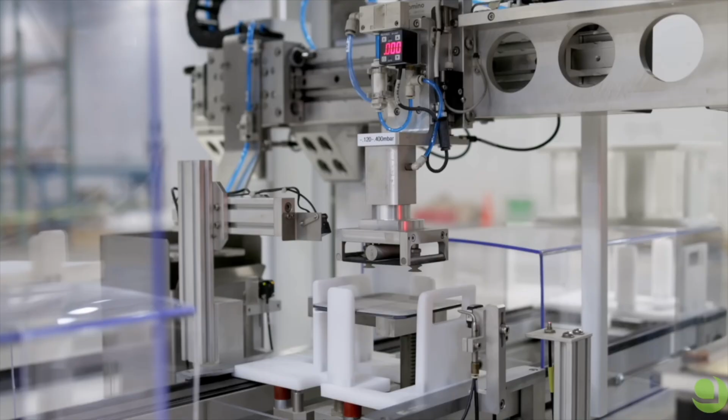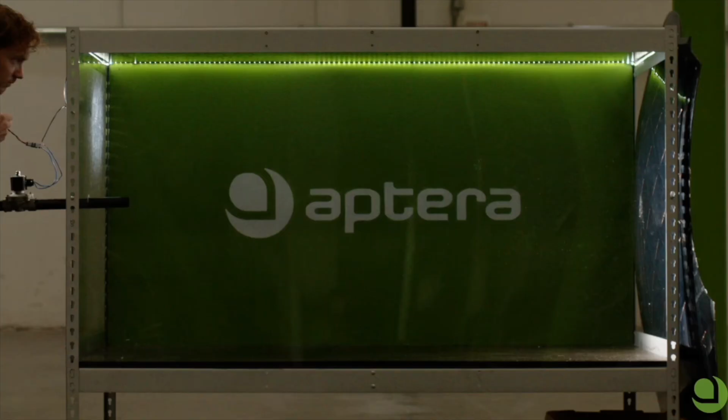Got another part for the podcast, and this is actually part four. This is the final part, and he's actually talking about his manufacturing process, what problems they may run into, and getting these Apteras into the hands of the people. And actually, he also talks about how they're going to set everything up manufacturing wise.

So yeah, let's go ahead and talk about that. We'll listen to it and then we'll talk about it at the end.

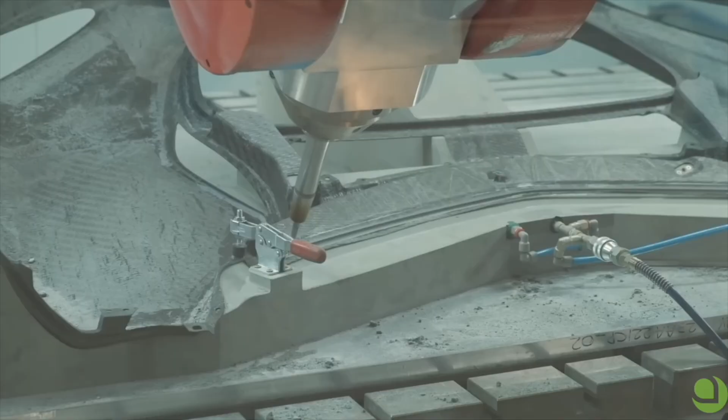You're listening to A Climate Change, and I've got Steve Fambro, CEO of Aptera. Steve, exciting times for you and the company. How many people are currently working for the company, and how many people are you going to need as the company goes into production of the vehicles?

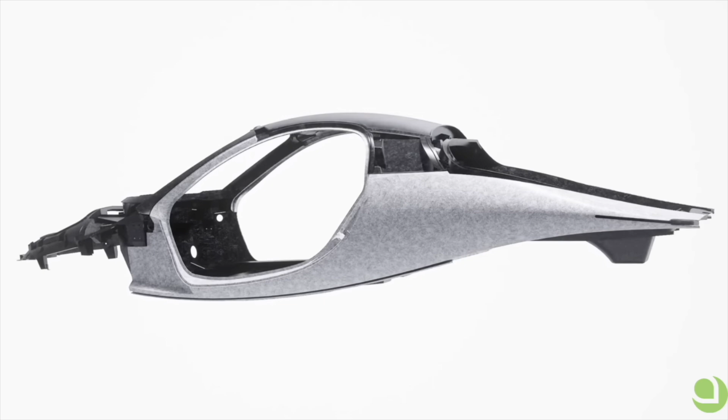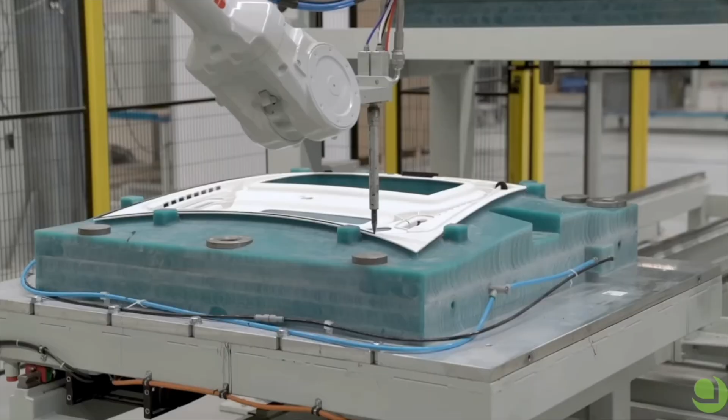Here in the U.S., we have about 100 folks under our roof between our solar facility just a couple miles down the road and here at the headquarters. Overseas, mostly in Italy, we have probably another 20 to 30 people, maybe 50 or so through various vendors that we're working with. So suspension, lighting, aluminum castings, that kind of thing.

To get the vehicle in production, the team in Italy will grow by about 30 folks. And our team here will grow a little bit less than that for the final assembly, because we're going to be doing the body assembly in Italy first, shipping the bodies over here, probably with the suspension and wheels on it, where we'll put on the glass, we'll put on the solar panels and that kind of thing.

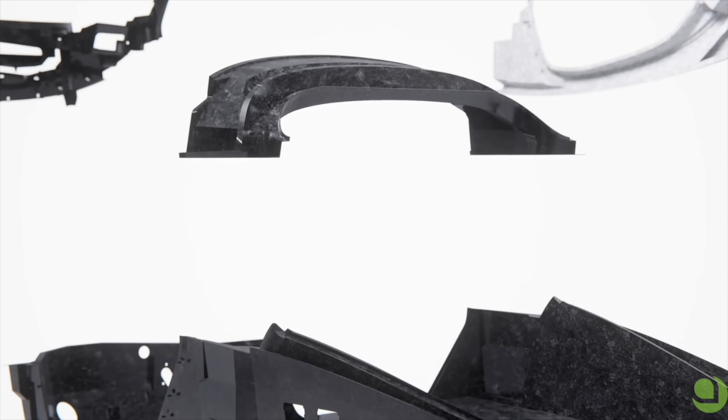That final balance of what we're going to do in Italy versus what we're doing in California hasn't been decided yet. But our original plan had us only hiring about 40 people for the factory here. It's going to be a little bit less than that. At a 12-minute takt time and 40 vehicles a day, there's not a lot of people that are needed.

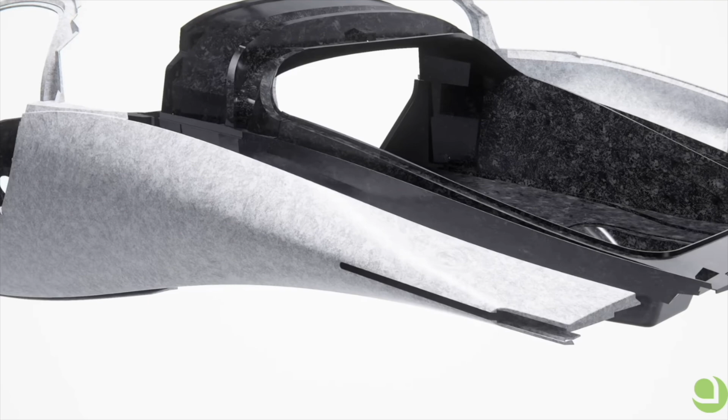Most of the engineering will increase for validation, testing, et cetera. Some of that will be outsourced through our partners that do that kind of work, Roush, et cetera. But some of those engineers will be full-time in-house. So you're probably going to see that climb up to about 300.

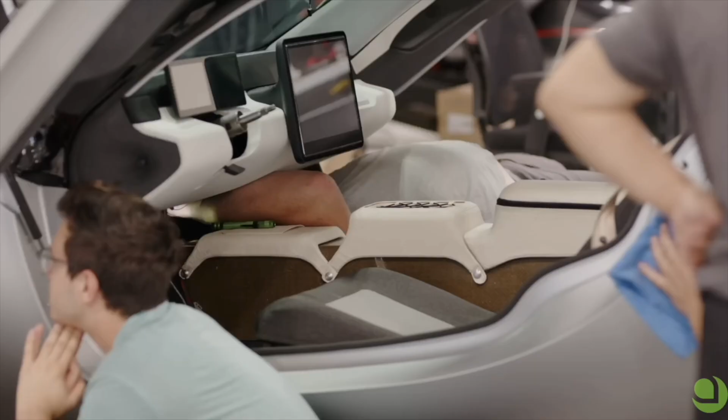And if you tell that to anyone in the automotive or startup electric vehicle industry, they'll laugh. They'll say, "There's no way you can do it with that. It's so small." But again, we're not building a traditional car. We're building a much simpler vehicle. It has fewer parts. A lot of our partners are validating these various systems for us.

So there's much less work that we have to do than a typical company. There's other EV companies who maybe have hired thousands, tens of thousands of people to do all of these tasks in-house. We just don't have to do that. We have competent partners that can do some of that stuff better than we can, and we leverage that.

So in terms of vehicle production, you had said 40 vehicles per day. I was just doing the math. That's about 1,200 vehicles a month, 14,000 vehicles a year. Is that your target? Where do you see this going in the future?

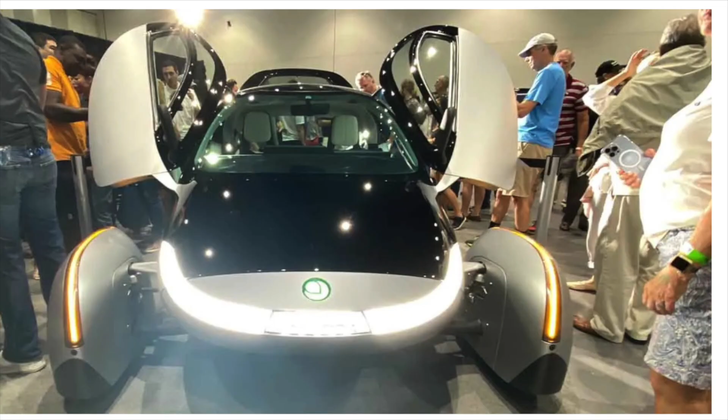It's 40 vehicles a day per shift for this building. What that gives us is a starting framework that we can demonstrate here and then either copy or scale. It remains to be seen based on all the different economic variables of energy, labor, everything else.

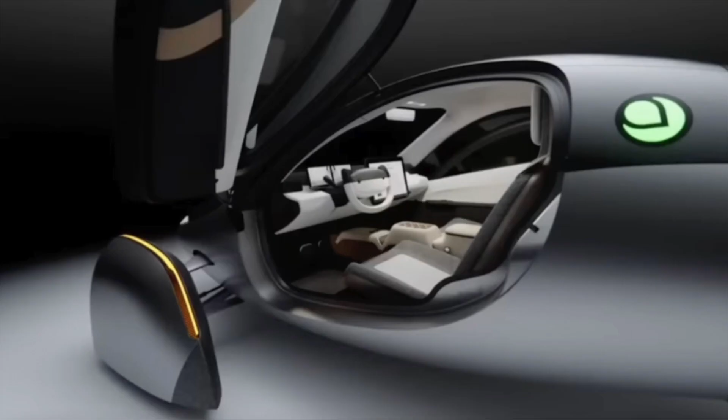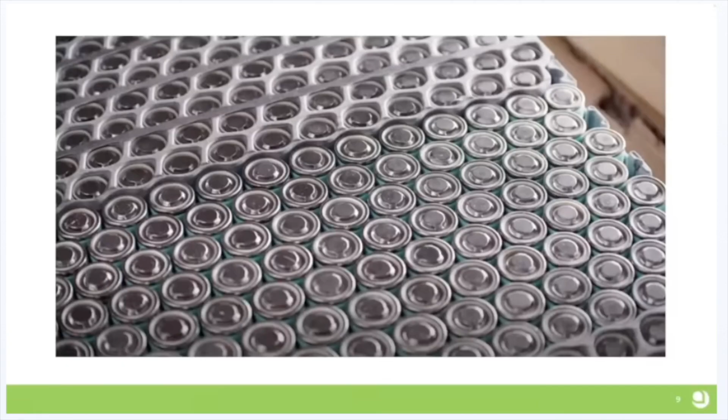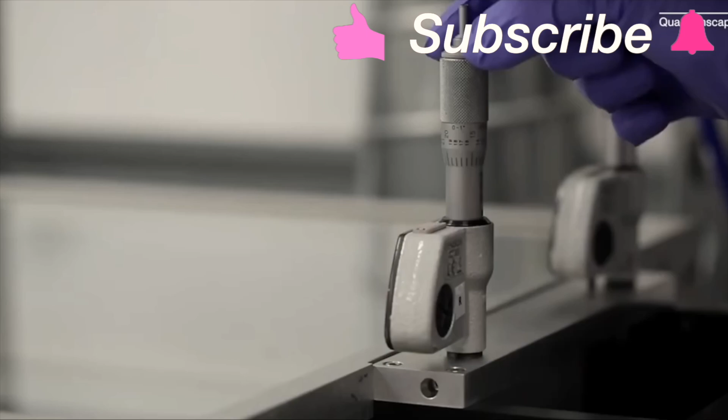If the optimum assembly for this vehicle is 2 or 3 facilities around the United States or one big facility somewhere, central or on the East Coast. That calculus isn't clear to me yet, which one of those are better. I know the way the industry goes. The industry goes for a single facility, and they do that because it's highly capitalized, and they can't afford to copy that capitalization everywhere.

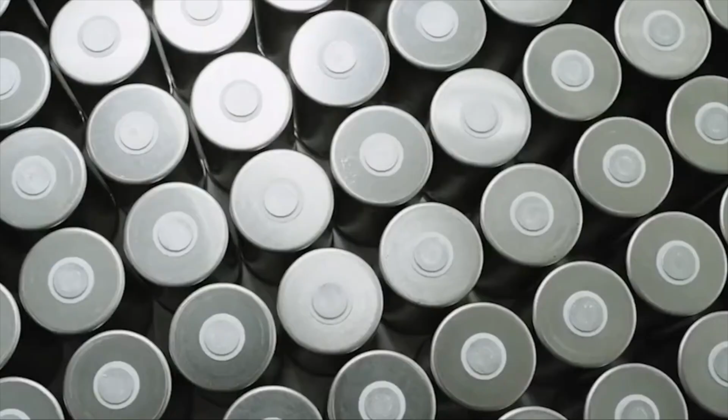But our vehicle doesn't have that. It's assembled very differently. When the parts come in from the suppliers, it's almost like taking flat packs of IKEA furniture and just deciding where you're going to put it together. You probably want to put it together really close to where you're going to use it, like in your living room or in your kitchen or wherever.

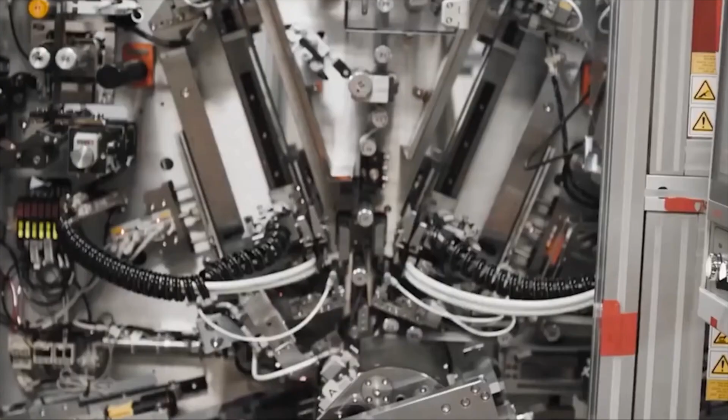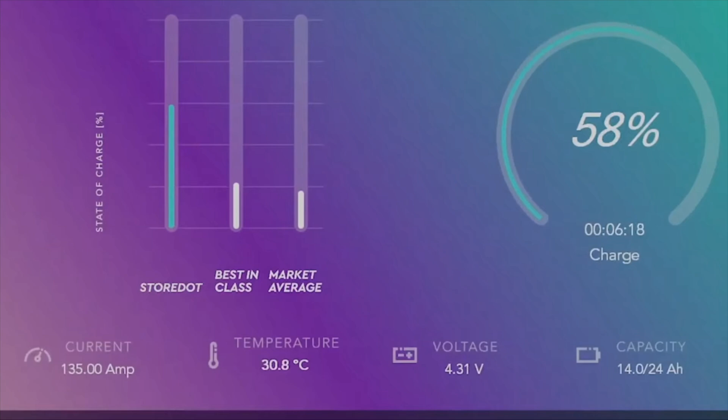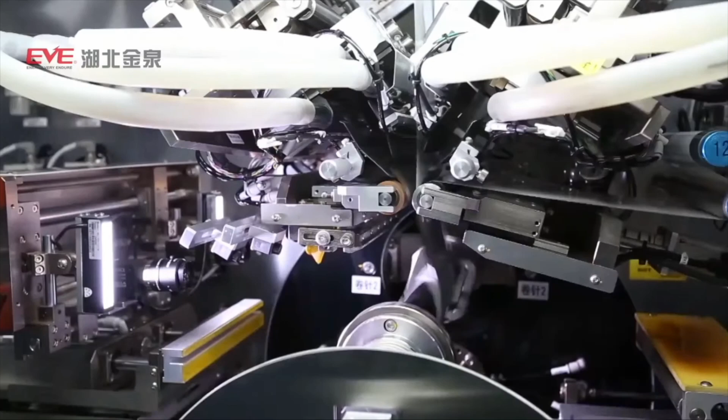You don't want to put it together some distance away and ship that product to there. So that is our strategy, is to have the subassemblies kitted and packaged from the vendors so that we can literally bolt this thing together anywhere in the world. And there's all kinds of advantages and reasons why you'd want to do that, not the least of which are tax advantages, depending upon the country that you're either building in or importing into, et cetera.

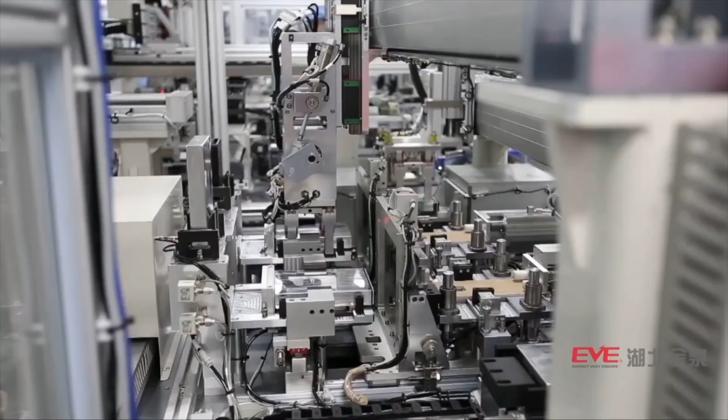That is fascinating, because that is truly revolutionary to put together kind of a car like a piece of IKEA furniture. I realize you're simplifying it quite a bit, but still, to stand up a manufacturing facility of a vehicle is usually a multi-billion-dollar equation, and to do it for far, far less than that is revolutionary.

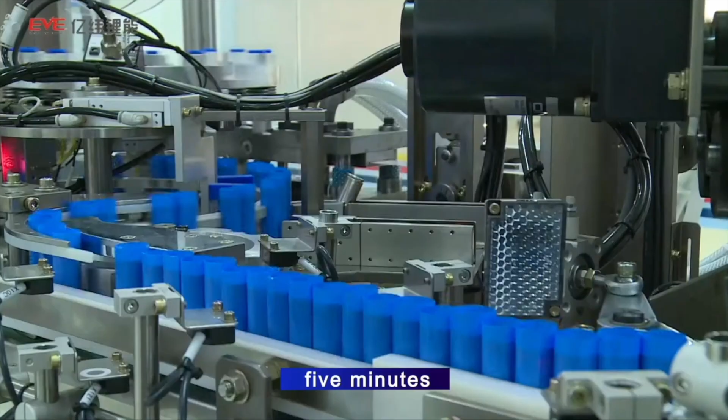It's expending a hell of a lot less in resources, and if we're talking about sustainability, that goes a long way. As we were discussing off air, one of the things was using less of this carbon fiber than you would of steel, because it is stronger, at a magnitude of 2, 3, 4 times stronger. So you're using less material as well in making the vehicle.

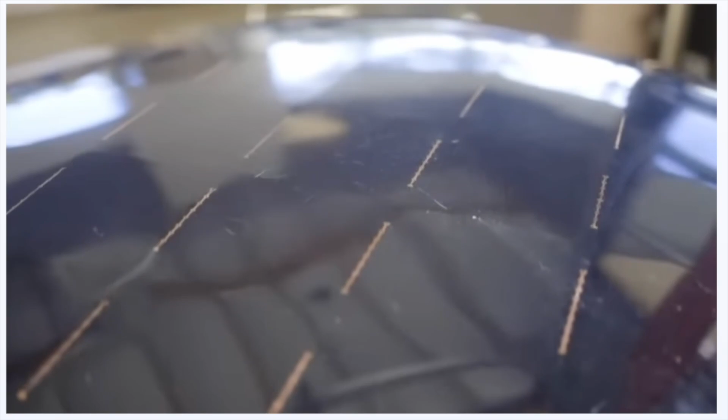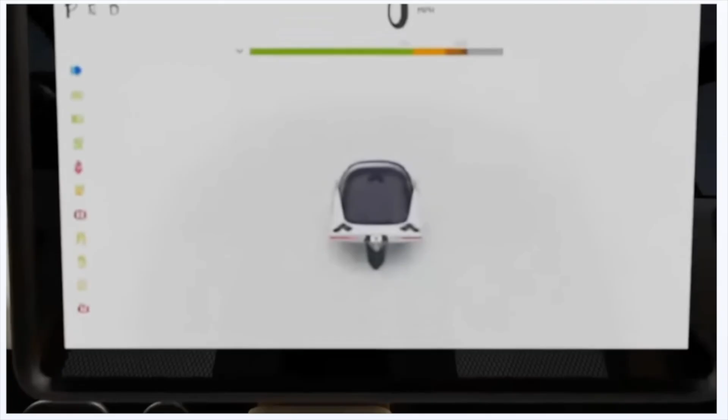That's right, and I think that's most engineers, most companies that engineer a product. They really only want to use the amount of material that's necessary. They don't want to overdo it. Nobody does. But in our case, we could have made our original Alpha vehicles that you've seen driving around. Those are 100% structural composites. So there's no steel or metal coming from front to back in the vehicle. The entire composite structure carries loads.

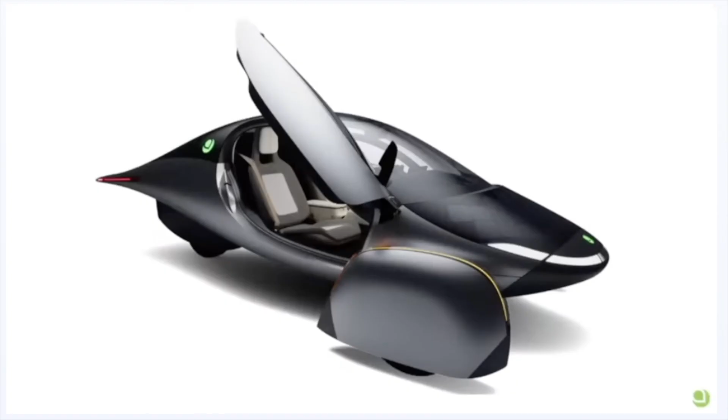And there's pluses and minuses of that. There's reasons why you'd want to do that or you wouldn't. In our case, what we found is, although we could make a technically lighter part with our sandwich core process I mentioned to you earlier, it wouldn't scale. That's a big reason. The second thing is that you can't accurately model it in a finite element analysis. You can kind of model it, but

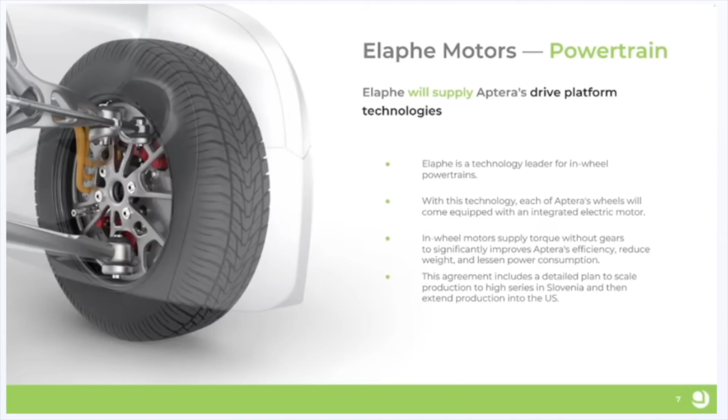because the material is discontinuous, to use an engineering term, you've got these hard interfaces of fiber and resin, and then a core, and those are all discontinuous. Those are what they call edge effects in finite element analysis, and it's very difficult to model that. So it means you have to do a lot of destructive testing to characterize a part, and companies do that all the time.

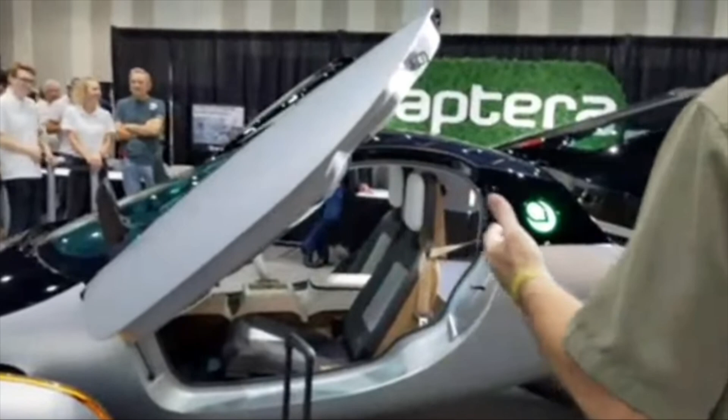But the advantage of going with CPC is that their material is homogeneous, and so it's well characterized. It's isotropic. It has the same reactive nature with force in any direction, as opposed to a composite panel, which is stronger in one direction versus the other. So we give up some of that weight benefit to have something that can be modeled easily. And that lets us really fine tune and reduce the amount of material that's needed.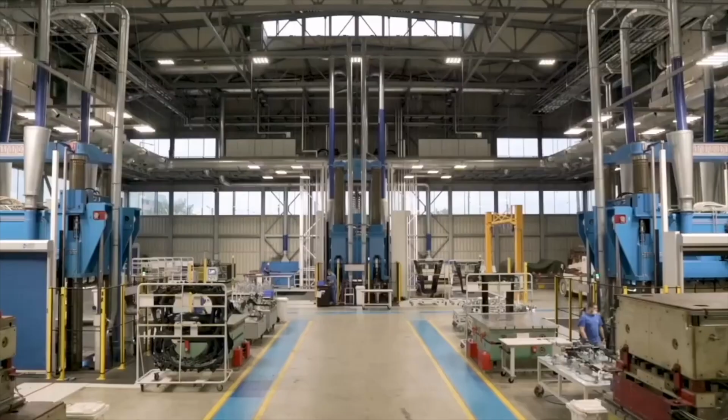And then we can start playing little games where you say, what if we make the battery pack structural, and instead of having that structure in the carbon, we can make the carbon tub thinner and make it cost less, because that was the most expensive part of the materials. So we've used aluminum. We have castings that connect the vehicle and the structural battery pack together. And we've been able to do that to lower the amount of carbon in the vehicle, to lower the overall cost.

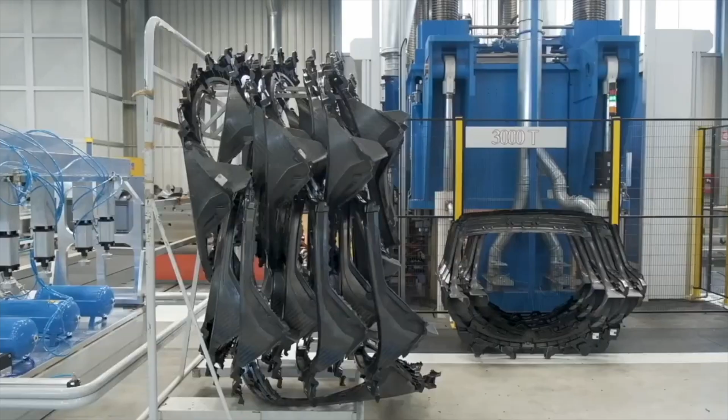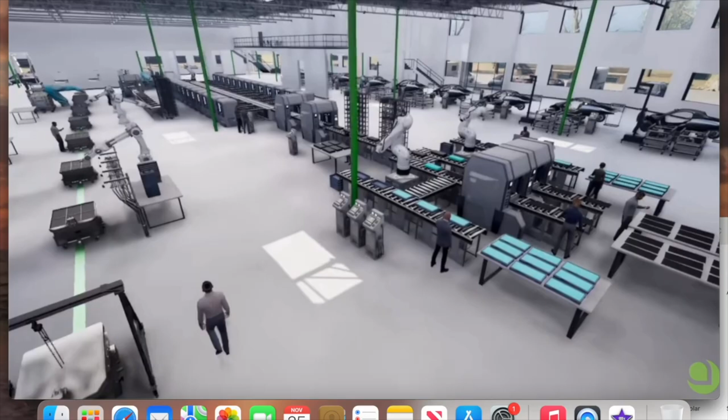We could make it out of more carbon and get rid of the aluminum, but it'd be a little bit higher cost, and we don't want to do that. So we're trying to have the optimum of performance, weight, and also cost. And this material and CPC's process lets us do that in a way that we could not do with sandwich core composites.

Sorry to interrupt you, Steve, but tell us about the three main objectives of the company over the next 3 to 12 months, and the challenges you face to get the vehicles out the door and into the hands of the public.

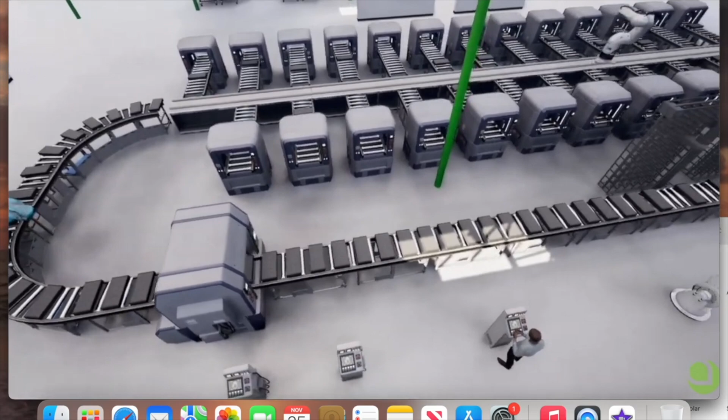The three big milestones, I would say, are wrap up our Series B fundraising, begin kicking off some of the high expense tools, both for the body and the motor. We've got to get in the order queue for some of the battery welding robots. So we close a round of funding, we can make all those orders, and then start getting body panels off the tools about mid-year to July maybe.

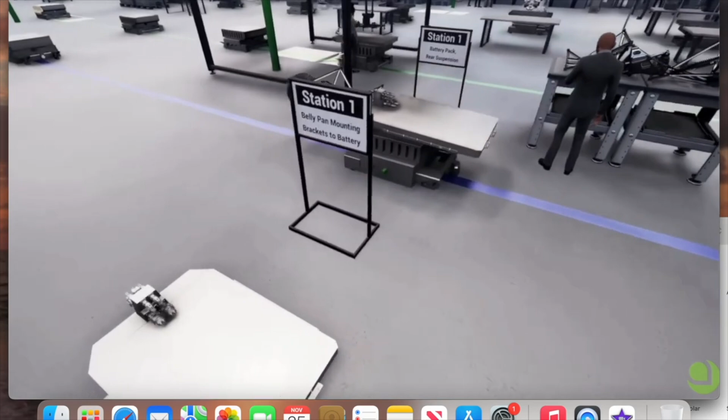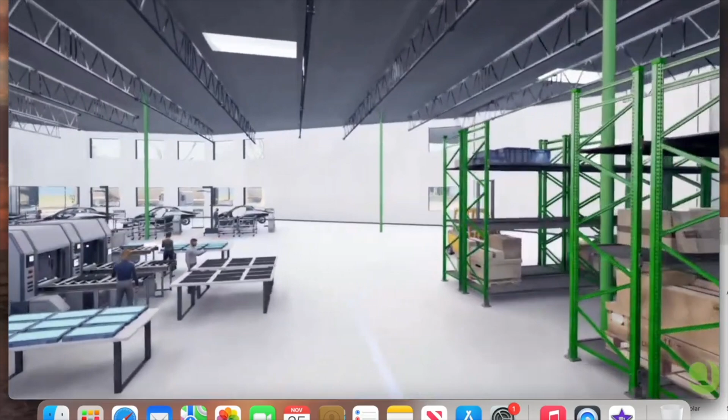And then once we're getting body panels off of the tools, we will have already had our castings and all that other stuff done. We can start testing the vehicle, sort of privately, not in the public, but doing the brake validation, crash testing, that kind of thing, because we'll have a manufacturing representative product, structure, body that's made off of production tools, made with production processes, and that's what we can characterize and validate.

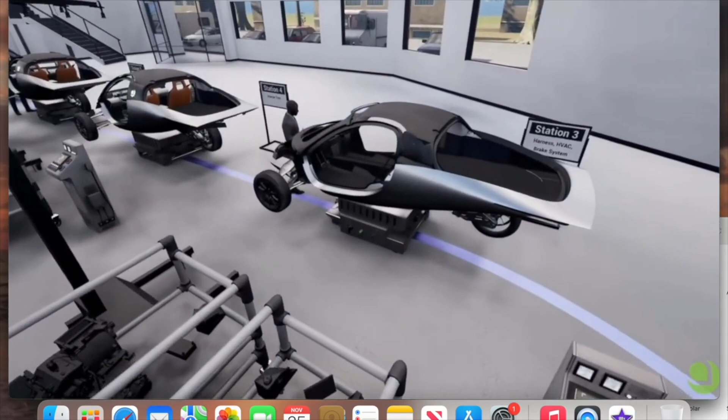So I would say wrap up the Series B, place the big purchase orders that we're waiting to do, and then start getting body panels off the tooling about mid-year, July, sometime that time frame, so that we can start doing some of the final validation.

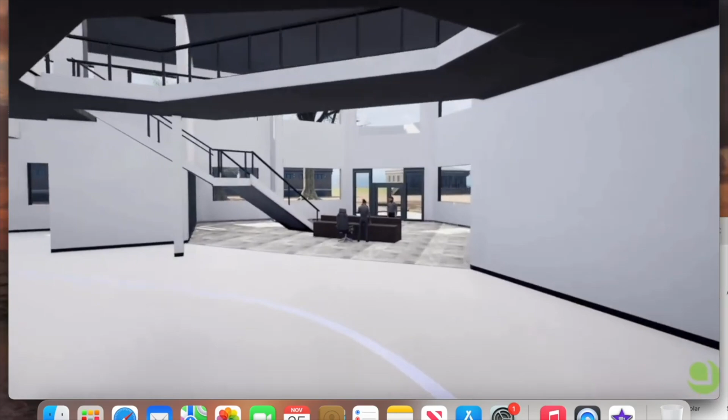So how much are these high expense tools that you're buying? Oh, not as much as a regular car company, but let's say an ultrasonic welder for the battery cells is about $250,000 a piece, and the best companies in the world that make them are German, and everybody wants them, and so there's a queue. And we need several of those. I say several, I'm being a little bit cheeky, more, probably 10.

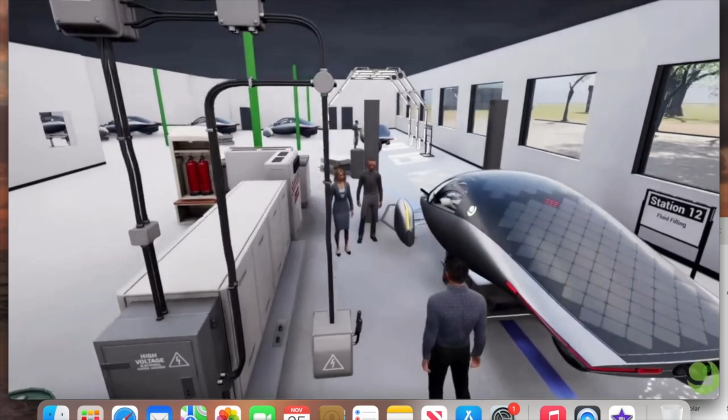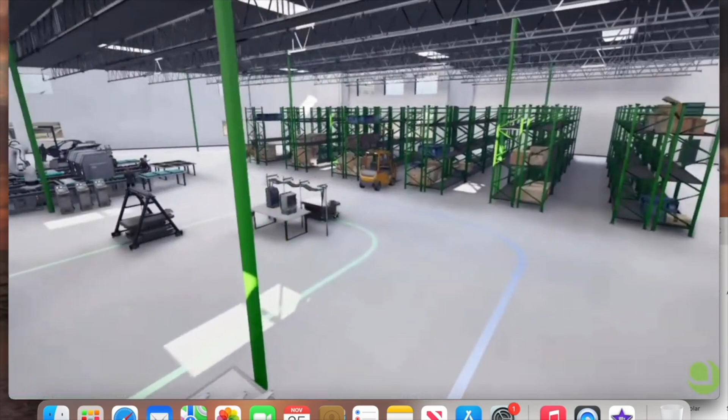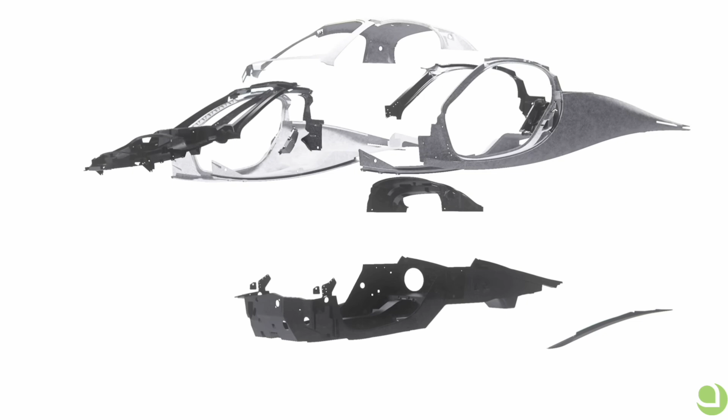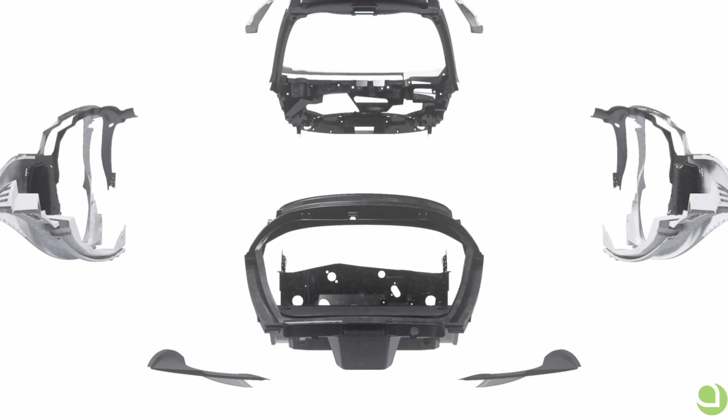Well, as you can see, I'm ending it right there. That was the very end of it. And Steve brought out a lot of good things. You can see that he is actually moving forward. He has a plan in place, and he always delivers on what he promises. So we can put full faith that what he's going to do is going to happen. So he's bringing out that they're going to start producing 40 vehicles a day, and they can actually ramp that up if they need to. The factory that they're going to be building at is pretty small, so they can replicate it with no problem, and they can place them just about anywhere.

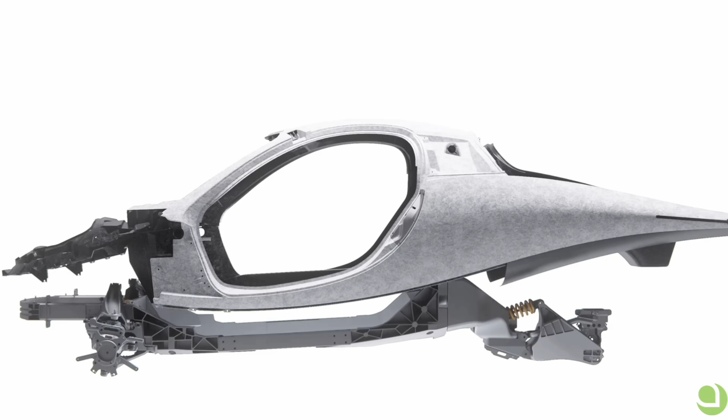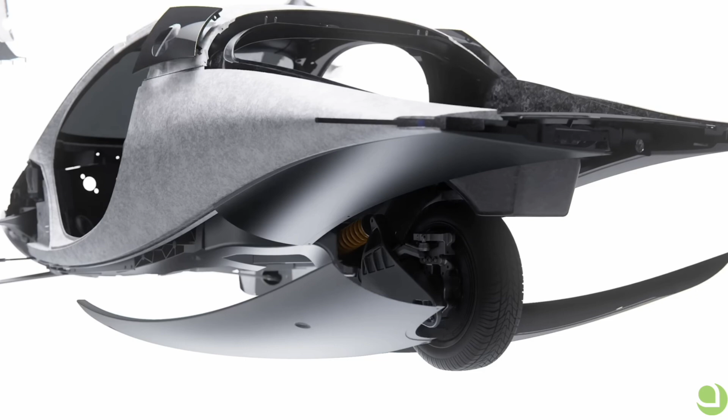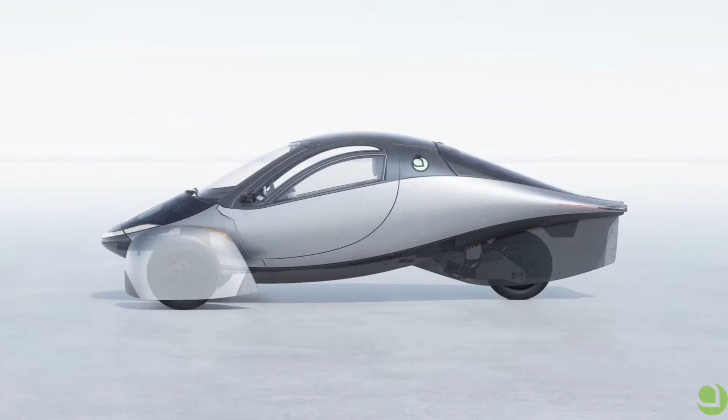And he's also expecting to get the bodies from the tooling in July. Hopefully it'll be sooner than that, but oh gosh, look how beautiful that is. And so he's going to start crash testing it and get all the information from the solar panels and the range and all that. So we'll be updated with that. But this car, look how beautiful that is. How could you not want that?

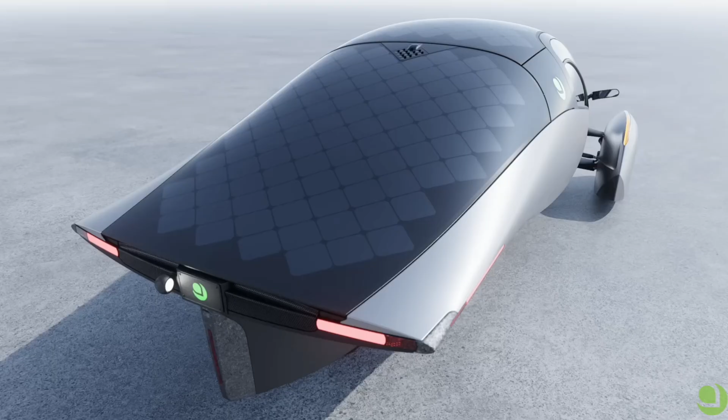This is an awesome vehicle. This is really going to change everything. Oh, I'm so glad I'm a part of this. And all those that have been waiting, I know they can't wait to get their hands on this, just like me. And so we have formed a little close-knit community here, the Aptera family. You could be a part of it. Either join or get you one. And then you can have this beautiful Delta vehicle. Oh my goodness. Well, it's not the Delta, it's an Aptera. But still, I'm just so excited. I can't even talk straight. I'm so excited.